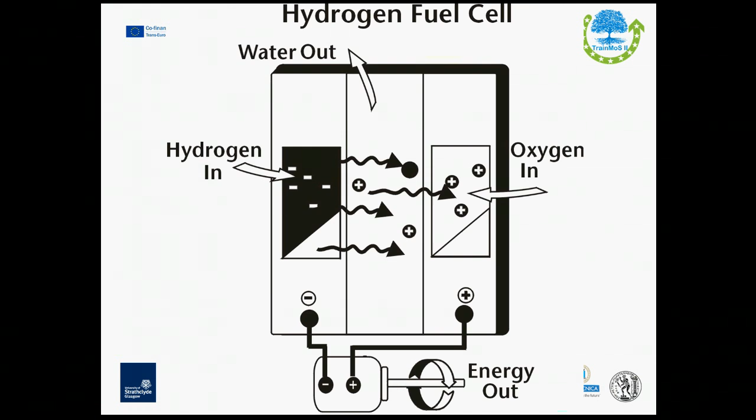So how does this work? In this apparatus, as you can see here, we have hydrogen coming in and oxygen also coming in, and then all the reactions create energy, and the outcome of these reactions is simply water. Water goes out. Let's see a video that describes how this works.

Another thing is also the hydration of the system, the delivery of the energy. There are a lot of risks there. The infrastructure that is needed, and actually we need to start upgrading the infrastructure in order to accept hydrogen production facilities. The storage of both the hydrogen and the oxygen, as well as the energy when it's already produced, and the safety and precautionary issues there.

Now, some examples where the energy has proven itself: of course, vehicles, bicycles, rockets, airplanes, buses, motorcycles, scooters. Pretty much in all different areas of energy needs, the hydrogen sources have proven themselves. However, going a little bit back, when it comes to ships and the maritime industry, and the shipping industry more precisely, the needs are a little bit different. And this is what you have to consider when selecting and addressing each system separately.

Now, again, some introductory definitions and issues that you have to consider. First of all, we have two different main families of fuel cells. The first is the stationary fuel cells. This is actually a system of fuel cells that can generate water from hydrogen or natural gas as a fuel, and from oxygen in the air, and as an output of this reaction, they produce electricity and heat.

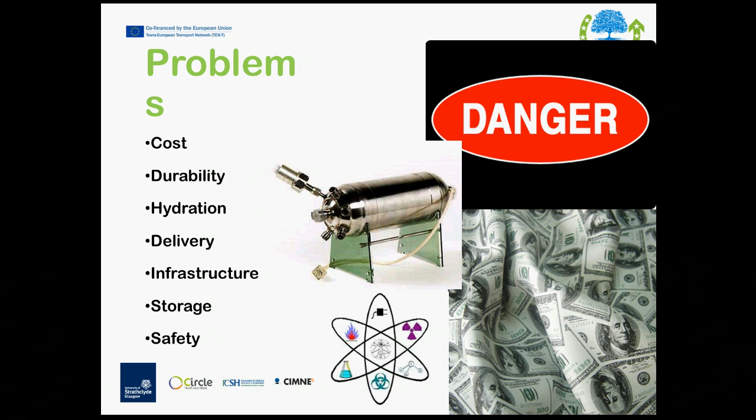So this reaction is carried out in each of the basic cells of the fuel cell, and each fuel cell consists of an anode, a cathode, and an electrolyte, which all allow the charges to move from one side of the fuel cell to the other. So the electrons move from the anode to the cathode through an external circuit, producing the electrical current and thus powering the load. Such cells are placed in series so that we can reach the adequate voltage output. When assembled together, the cells constitute an energy module of the required power known as the stack.

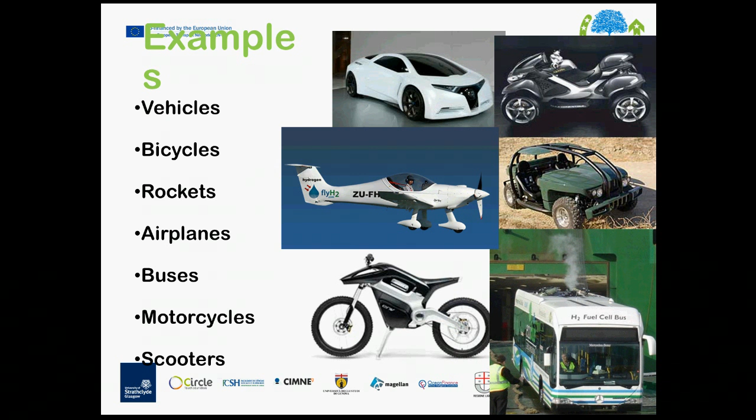Sorry guys, I don't know what's happening. It keeps on dropping out the internet and closing down. So please bear with me.

Now, that said, the fuel cell types belong to these three categories. The first one is the proton exchange membrane fuel cells, the icon we saw earlier. We also have solid oxide fuel cells, and we have the molten carbonate fuel cells. These fuel cells are classified according to the type of electrolyte they are using. In the proton exchange membrane fuel cells, a proton conducting membrane is used as an electrolyte.

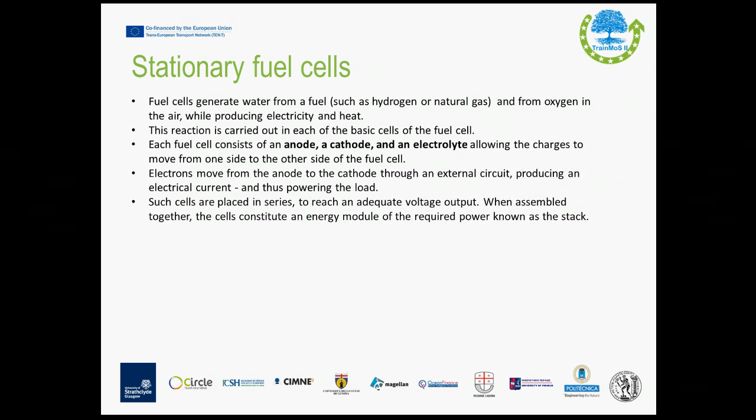So in pure hydrogen proton exchange membrane fuel cells, hydrogen is dissociated into protons (H+) and electrons on the anode. Protons are conducted through the proton conducting membrane to the cathode. As the membrane is electrically insulated, the electrons move from the anode to the cathode through an external circuit, producing the electrical current. On the cathode, oxygen reacts with the electrons and the protons, and they form water. Of course, these are the basic reactions. It's purely sixth grade chemistry, or even earlier than that today.

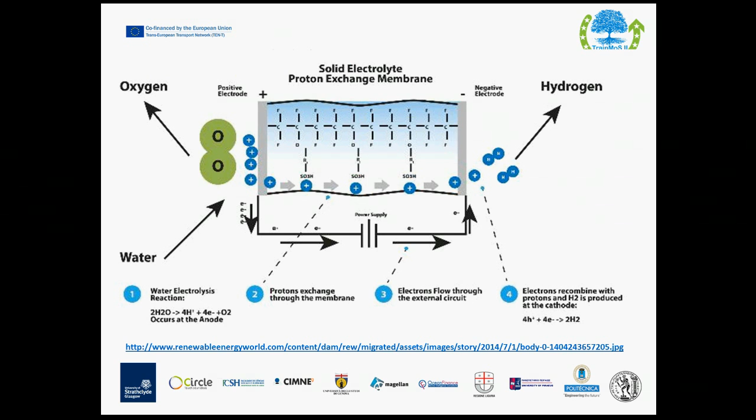Such fuel cells operate at temperatures between 50 and 220 degrees Celsius, but typically in the range of 80 to 90 degrees Celsius. Other types of these structures also exist. For example, some of them are fed with a mixture of carbon dioxide and hydrogen. And the proton exchange membrane fuel cells are preferred for mobile applications, because they are easy to set up, they are not so sensitive, and of course they are cheaper.

Now, the second family of fuel cells is the solid oxide fuel cells, which use a ceramic material called yttria-stabilized zirconia as an electrolyte. In these solid oxide fuel cells, oxygen gas reacts on the cathode with electrons, and they form negatively charged oxygen ions. These oxygen ions move through the electrolyte from the cathode to the anode, where they react with hydrogen gas, producing electricity and water.

Solid oxide fuel cells operate at higher temperatures between 800 and 1000 degrees Celsius, and they can be fed with fuels other than hydrogen gas, such as natural gas, for example, or some other type. The natural gas is then reformed internally and converted to hydrogen.

The third family is the molten carbonate fuel cells, which use lithium potassium carbonate salt as an electrolyte at very high temperatures above 600 degrees Celsius. This salt melts and allows for the movement of negative carbonate ions through the electrolyte. On the anode, hydrogen reacts with carbonate ions to produce mainly water, carbon dioxide, and electrons. The electrons then move from the anode to the cathode, producing an electrical current. And on the cathode, carbon dioxide from the anode and oxygen react with the electrons to form carbonate ions.

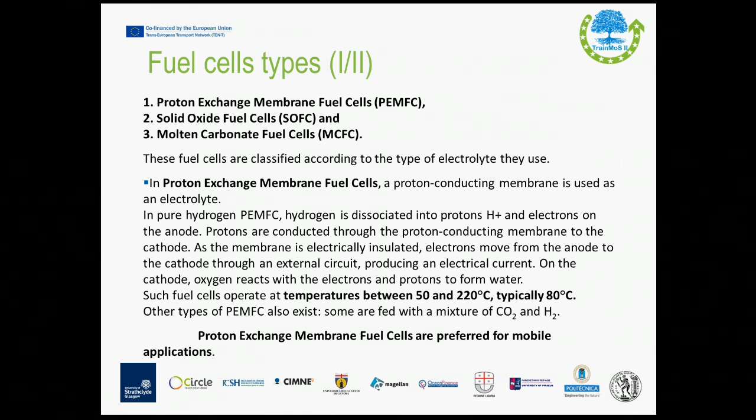Molten carbonate fuel cells are fed with fuels other than hydrogen gas, for example natural gas or any other gaseous type. And as in the solid oxide fuel cells, natural gas is reformed internally. So because of their high operating temperatures, though, and because they're not that stable,

they cannot be used as mobile devices, and they have slow startup times in order to reach the high operating temperature. They are used only for stationary applications, stationary stations, for example in large warehouses, or they could be used in large ports.

Now, hazards and safety measures. Fuel cells are low pressure systems, and upstream of the fuel cell, the hydrogen feed pressure is reduced to low pressure, for example, 250 millibars, less than a bar, at the cell's inlet of the Axane fuel cell Comm Pac. This is one of the devices that are widely spread.

So when we are talking about stationary fuel cell systems, most of them are free from hazards related to handling pressurized hydrogen. So it's quite robust when using hydrogen. However, since fuel cells consist of a stack of basic cells in which chemical reactions take place, there is the risk of leaks, and this is one of the main hazards

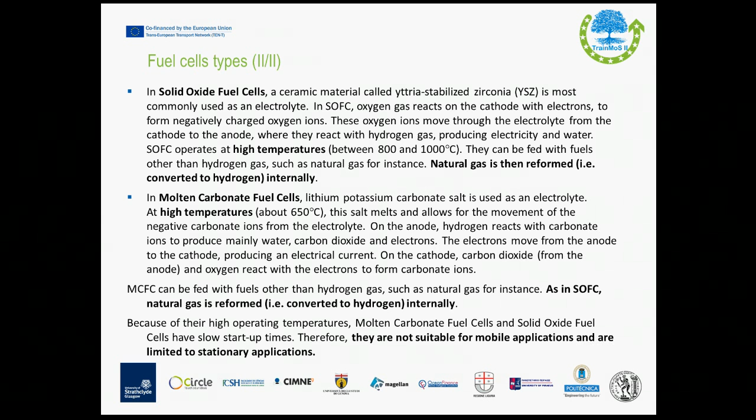And this is why we actually haven't used such energy sources so heavily so far in other modes of transport like shipping or short sea shipping, because of these issues that have not been studied yet.

Now, some standards. These are the standards that all the stationary applications have to comply with. For example, the IEC 62282 on fuel cell technologies. We will not be discussing those per se. I have just included all these standards for you to study in your spare time, or if you decide to go down this road using hydrogen, start studying all these standards.

So we have the fuel cell technologies. What are the fuel cell technologies? What is the main terminology here? We also have the minimum requirements for safety and performance of fuel cell modules, which apply to all fuel cell modules with alkaline, proton exchange, and so on, electrolyte chemistry.

We have basic fuel cell power systems with regard to safety and the measures that have to be taken in self-contained fuel cell power systems, or fuel cell power systems comprised of factory matched packages and so on. We have the fuel cell systems.

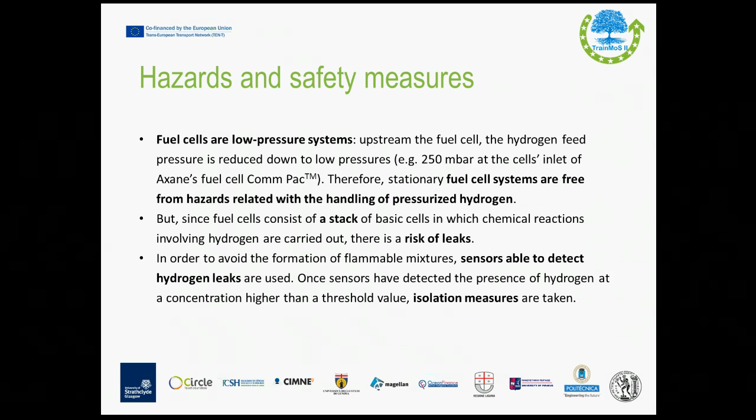This IEC 62282-4 is the standard that pertains to fuel cell systems for forklift applications. Actually, forklift applications are some of the more robust applications that we are using these days in shipping value chains, so to speak. So this standard pertains to these applications.

Additionally, similar to these forklift applications, we have other auxiliary systems that are based on similar energy sources and energy source structures. We also have fuel cell technologies for small stationary power systems serving as heating appliances, both producing heat or producing cold, and this is actually what is needed in cold storage.

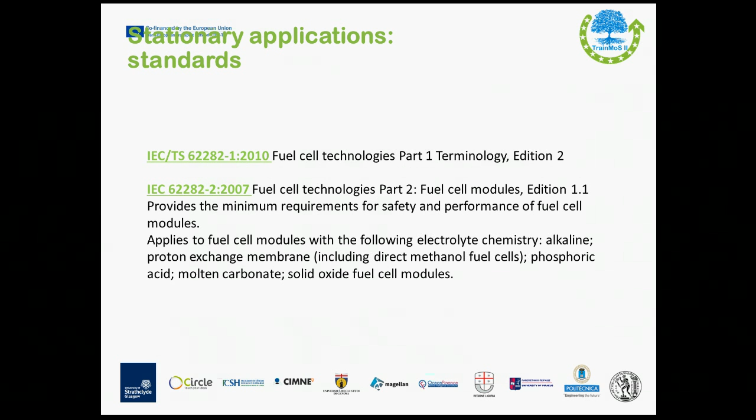For example, in a small cruise ship, the cold storage for the stores or for the food, with vegetables and stuff like that. We also have stationary fuel cell power systems installation guides, which provide the minimum safety requirements for the installation of indoor or outdoor stationary fuel cell power systems.

This standard here covers the safety, performance, construction, marking and test requirements and the interchangeability of fuel cell systems on board specialty vehicles and other auxiliary power units for the transport value chain.

And the last one here is fuel cell technologies for stationary fuel cell power systems, safety issues and safety precautions, which is partly covered by the IEC 62282. Basic considerations, then further on, basic considerations of indoor use of hydrogen standards.

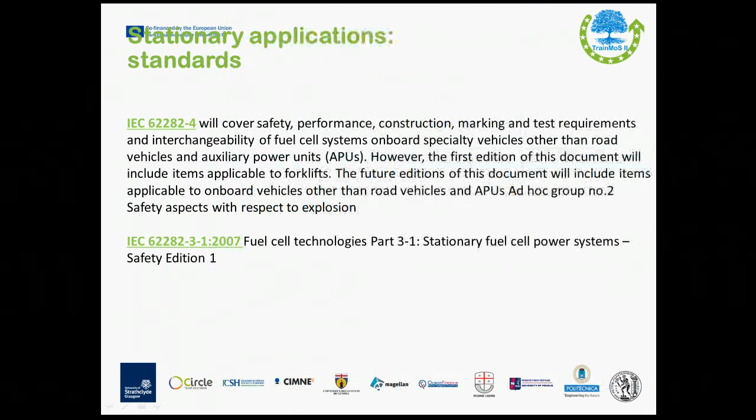Now, there is a set of standards describing the explosive atmospheres, what are the safety precautions, and what is the equipment that can be used or should be used in order to protect ourselves. So parts 1 through 18 of the IEC 60079-1 give all these definitions and explain in more detail what sort of equipment is needed.

Also, there are the material characteristics for gas and vapor classification, the test methods and the data. It's actually the network of sensors that we were discussing earlier on, what sort of sensors are needed there. And the last one is the explosive atmospheres, the gas detectors specifically, and the performance requirements of detectors for flammable gases.

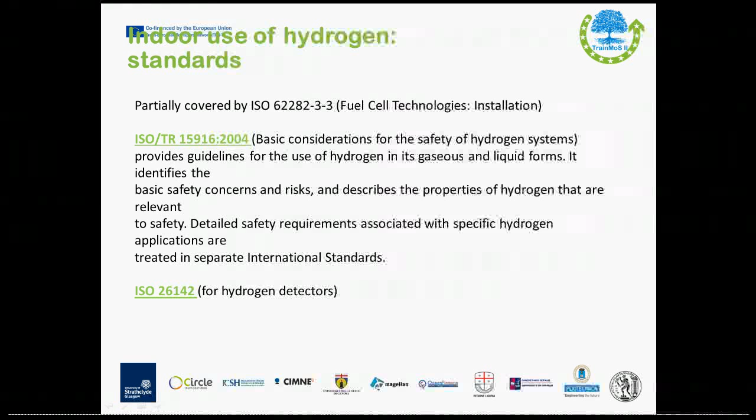Now, that said, we will go through a short case study of deploying fuel cell powered forklifts at large distribution centers of the USA Department of Defense. This is a case study by Michael Keynes back in 2013. He tried to study not only the effectiveness but also the efficiency and the cost efficiency of these systems.

Now, these are the four project sites that were used over there. We have four different types of mobile and stable production.

Now, the approach included gathering all the detailed cost data at each site from participating manufacturers, the on-site staff, and open source literature, comparing these costs against some benchmarks that they already had, and comparing them with alternatives that they could find. They also tried to address capital and operating costs, CAPEX and OPEX, and they tried to analyze about 10 years forward looking of real costs without making any discounts.

That is, they tried to make the analysis without playing around with interest rates and making up things with the NPV. Now, let's see what they came up with. First of all, the cost categories that they considered. These are the cost categories that you have to consider when addressing these hydrogen production units.

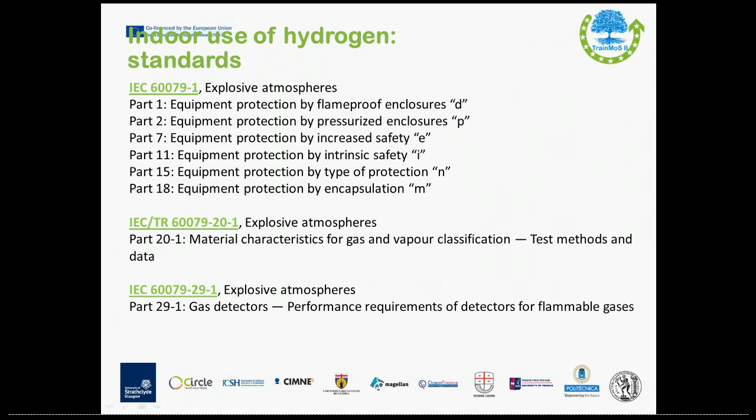Infrastructure depreciation, infrastructure operation and maintenance, the space that is needed, the fuel source, whether it's going to be natural gas or water or whatever, and the power that is required in order to give sparkle to this system. So in this case, they compared the cost of the delivered H2 energy source.

Now, with regards to the fuel cells, what were the cost categories that they considered? The forklift depreciation, the forklift operation and maintenance, and the spares and servicing of the forklifts. Also, the fuel cell operation and maintenance, including the spares and servicing, fuel cell refueling labor time, the hydrogen infrastructure operation and maintenance, the infrastructure space cost, and the hydrogen produced and delivered.

Now, some more cost categories for alternative energy sources, for batteries and propane. In the case of batteries, they tried to come up with figures regarding forklift depreciation, forklift operations and maintenance, battery depreciation and operation and maintenance, charger depreciation and charger operation and maintenance. That's one of the biggest cost elements in this analysis, in this study.

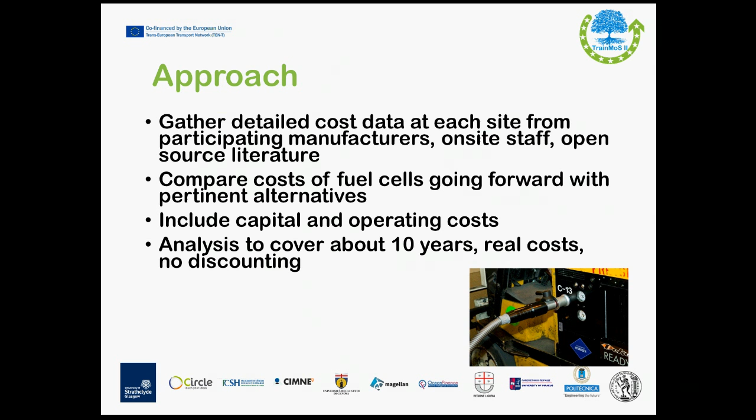The power that is needed to recharge the batteries, the battery change labor, the infrastructure operation and maintenance, and the infrastructure space cost. Also, with regards to propane, the cost categories considered were the forklift depreciation, the forklift operations and maintenance, the fuel, the price of the propane, the infrastructure depreciation, the infrastructure O&M, the infrastructure space, and the refueling labor.

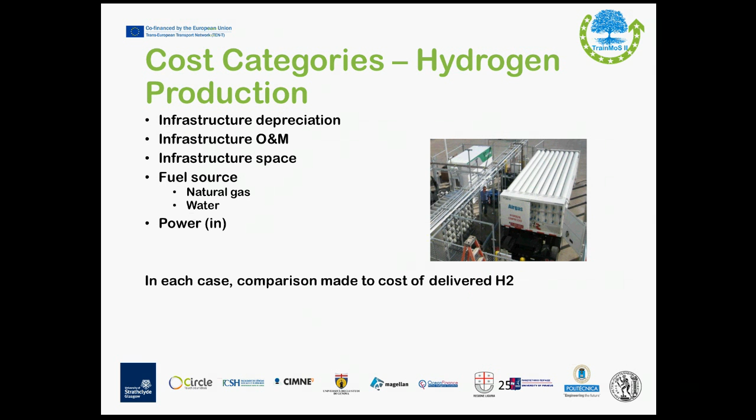So as you can see over here, they tried to come up with relevant figures from all the different sources so that they could produce a level playing field along all the different systems that they were analyzing there.

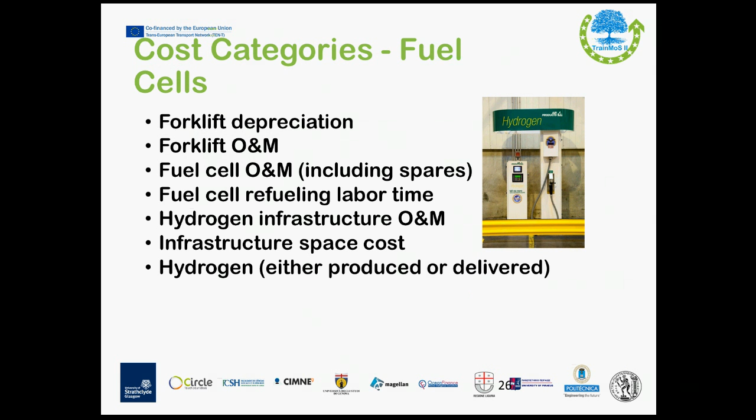Other factors that were also considered are non-economic factors, including the reduction in hydrocarbon emissions, the reduction in greenhouse gas emissions, the enhanced work productivity with fuel cells, the DoD leadership in national energy effort by creating a market opportunity for fuel cell technology. That is the branding that the DoD wanted to put forward. And the development of a transport option that might have value to DoD and others in the future. So they tried to consider the wider social implications that this new technology had.

So the thing here is, of course, you can all understand that in the first case we have solid figures that we can assess quantitatively, and in this case we have more of a qualitative assessment. So no matter what hard figures you might come up with, if the leadership really wants to invest or really wants to adopt this new technology, then you cannot really go by this decision. But anyways, we will see what happens there, and we will see what are the key drivers in this decision.

Now, we can see that the cost of producing the H2 and the cost of delivering the H2 is different in each case. For example, in one of the sites, the DDWG, which had a steam methane reformer, the cost of producing H2 was about $22.4, and the cost of delivering the H2 without counting any system losses was $22.5 a kilo. So we can see that there is a difference, a big difference between cost of producing and delivering, and this goes along with the rest of the figures there. So there are a lot of systemic losses over there that we have to address.

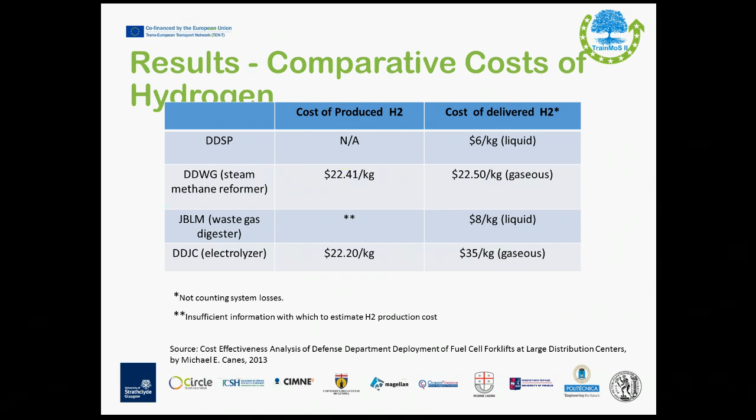So if you have, let's say, a small warehouse and you have a couple of forklifts or whatever, and you will be using your hydrogen production facility for a couple of hours a day, then this entire structure has a lot of fixed costs, and you would end up paying a lot of money upfront for this investment without ever being able to take this money back. So you have to compare the utilization. You have to run this system as efficiently as possible.

And that's the second thing, that when they tried to compare different solutions, the cost of transporting gaseous H2 is higher than, for example, the cost of transporting, I don't know, water or whatever. So all these different elements in this cost structure came up with a different figure, and this would become a different factor in your analysis. You have to consider all these different practicalities, all these localities in your impact assessment, and see what is the best, fit for purpose system that you will be suggesting or proposing.

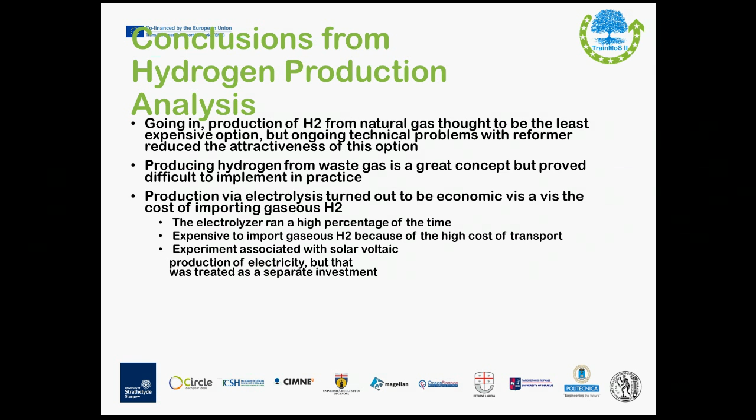That is, that it's very expensive yet to produce fuel cells. In 10 years' time, this curve will be lower. It will be easier and cheaper for us to produce fuel cells compared to what is the cost structure today. And actually, that was the idea, and that was the case with photovoltaics.

15 years ago, it was also expensive to produce energy from solar panels. Today, it's about a fourth of the original cost. Now, extrapolate this to an entire system. That was the vision 15 years ago. That was the vision from the European Commission to have entire areas, surfaces full of photovoltaics producing energy.

Now, the whole idea is that back then the cost, especially for smaller installations, was something like 3.5 to 4 euros per watt in order to install this facility. Nowadays, it's closer to 1.5, 1.4. So you can understand that the cost of installation has dropped dramatically, as is the production capability.

I mean, today, the same surface for photovoltaics can produce up to 3 times more compared to what the production capacity was 8 years ago. So you can see how all these systems evolve through time. And this is why we can see here that the fuel cells used in the forklift case cost twice as much as the old battery forklifts.

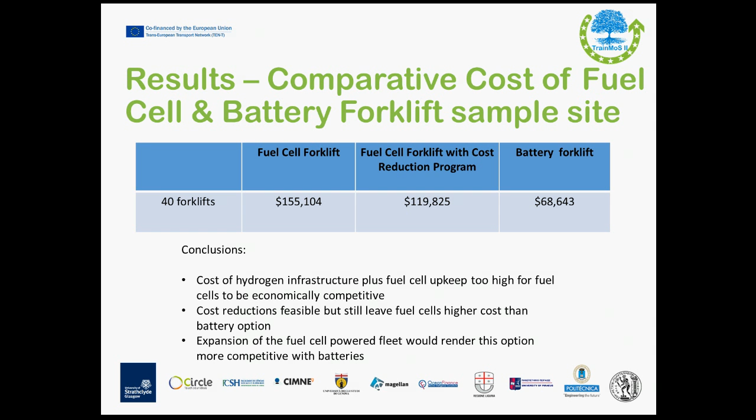For example, the propane-based forklifts are more risky compared to fuel cells. The hazards of explosions are quite more, and the consequences are more dramatic compared to fuel cell explosions and stuff like that. So these are more issues that someone has to consider before making any arrangements whatsoever.

Now, again, some more conclusions that came up were the utilization of the system itself, as well as adding more elements to the system, trying to utilize as much production time from the fuel cell production as possible. It goes back to the argument made before. All these issues and all these metrics have to be carefully considered before making any conclusions or any commitments to the system.

Now, some overall conclusions from this study. Fuel cells were not economically competitive in any of the four experimental projects, and these results were actually expected. However, the relative attractiveness could be increased by the following drivers, and these are the drivers that you can start manipulating in your analysis in order to see what's more economical, or these are the drivers that will make or break your proposal or your system.

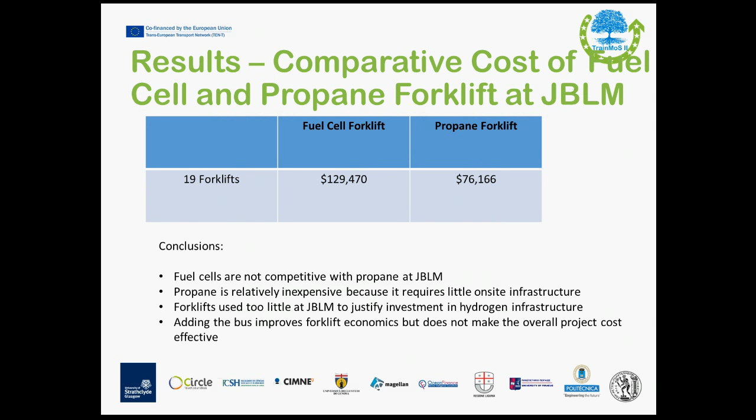Similarly, in the shipping sector, the late Marco Polo 2, the Motorways of the Sea nowadays, part of the TEN-T program, subsidizes heavily alternative energy sources for the shipping sector. And even national initiatives in each of the European Union member states also subsidize heavily alternative energy sources.

And of course, there is a certain trend with the ports these days to supply green energy to the ships, the cold ironing of the ships. And this green energy usually comes from windmills, photovoltaics, hydrogen, and so on and so forth. So you can see that there are a lot of incentives that could be taken as an advantageous form of making up for the cost of energy supply.

This goes along with longer-term contracts with specific companies. By the way, in the shipping sector, this has taken the form of cold ironing for the ships, or energy supplies for refrigerated containers directly from the energy producers in its member state, in its EU country.

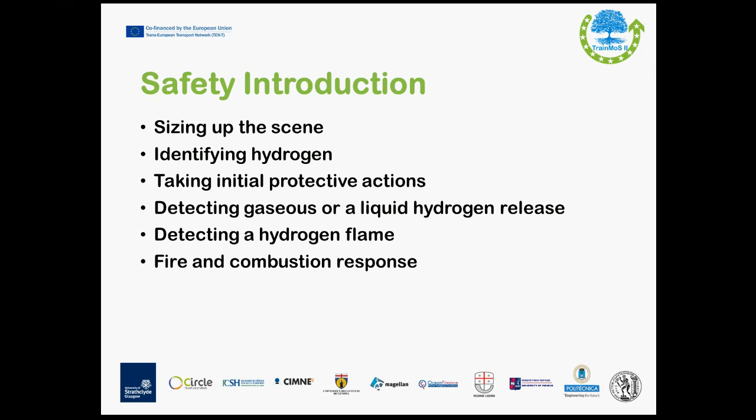And of course, the standard firefighter turnouts and respiratory protection are in any way necessary when working on an incident where hydrogen leaks or fire occurs. And if the incident itself involves liquid hydrogen, you have to wear thermal protective clothing too. That's a very crucial thing, a very important issue there.

Now, non-static equipment and tools are required. Why? Because in leakages, hydrogen cells are quite, and we're going to see that later on, quite explosive. And of course, if you also add up the LNG, that is one of the raw materials to produce fuel cell energy, it is even more explosive. So all of the people working in such environments have to wear non-static equipment, and all the tools have to be insulated from static electricity.

That also pertains to fire extinguishers, fire blankets, brooms, pretty much whatever you will be using there has to be insulated. Now, wearing jewelry, rings, necklaces, all that stuff is strongly discouraged, as most of the bibliography says. Why? Because these might bear static electricity and might produce the ignition for the explosiveness of hydrogen. And equipment also provides firefighters, and all those working there, with the essential protection that is necessary from the potential of electric shocks, flammable explosive gases, hazardous fumes, and so on and so forth.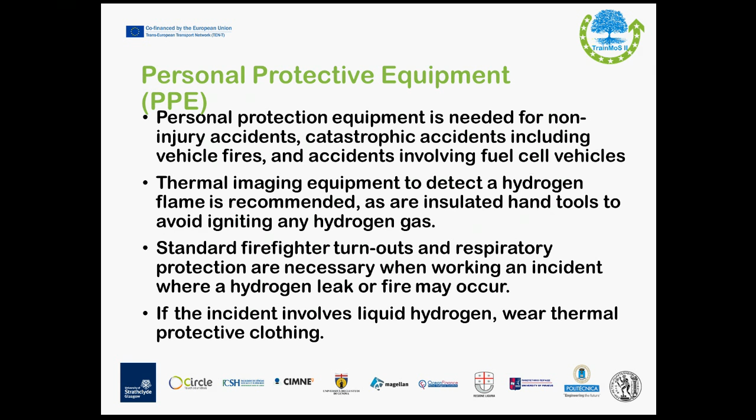By the way, we're going to see that also later on, but the power that is needed to produce energy from fuels, for example in vehicles or in forklifts, is higher compared to traditional energy sources. For example, in traditional energy sources, you have 12 volts or 24 volts, and that's the maximum. However, in hydrogen powered systems, the voltage might reach more than 50 volts, and 50 is actually the threshold where you can have a heart attack.

So you can see that if you're not insulated enough, you might be electrocuting yourself when trying to handle equipment in such an environment. So you have to be very, very careful. You have to wear all the protective equipment in order not to harm yourself or anyone else there.

Now, additionally, personal protective equipment that should be worn in a hazardous environment includes self-contained breathing apparatuses, coveralls, turnout pants and turnout coats, fire-resistant gloves, of course, high-voltage rubber gloves, and that's very important, especially in stationary stations where the voltage is quite higher compared to other stations. Boots, steel toes and shanks are also necessary.

Helmets, face shields, and in some cases where we have leakages of poisonous or other sorts of material, in cases of hazmat that is, you have to have hooded chemical resistant clothing. That is the two-piece chemical splash suits, the disposable chemical resistant overalls, and the disposable chemical resistant boot covers. So all of that is quite necessary when an incident occurs.

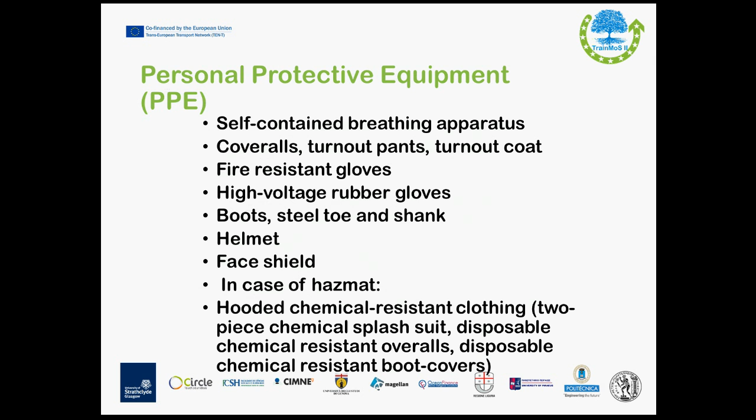Now, general hazards and risks for hydrogen storage. Hydrogen is capable of migrating through small openings, so even small cracks on the equipment will release the entire content of the container. The main concerns there for the emergency responders, so if something happens in a warehouse that you could be working in, or on a ship, on a vessel, or in the port, is that you have to protect yourselves from electrical shocks and from the flammability of the fuel itself.

Other additional concerns might include cryogenic burns and asphyxiation. For example, the cryogenic burns, you will see later on that on certain cracks, when the hydrogen is released, you can see a snowy-like area, a frozen area around the crack from the low temperature of hydrogen. This can produce cryogenic burns, which are treated, but it's not a good thing to have actually. And of course, asphyxiation, we talked about asphyxiation earlier.

Now, venting of stored hydrogen may also be the best means of mitigation, ventilating the situation that is, as long as the area is free from ignition sources. So you have to be very, very careful of the situation over there.

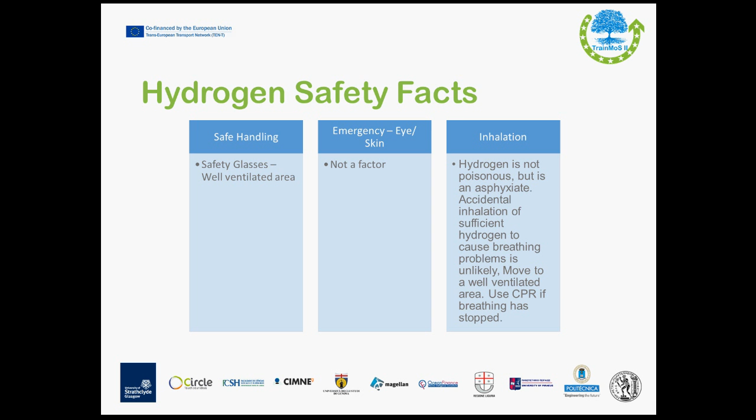If there are any ignition sources whatsoever, you have to be extra careful in the ventilation. Hydrogen will dissipate very quickly and will combine with oxygen to form water. So these are things that you have to consider in order to attack a leakage of hydrogen.

Now, how to? Easily said, you have to actually eliminate all ignition sources. So no smoking, no open flames, no ignition from wires, stuff like that. You have to keep all your tools and all the equipment in good condition, and you have to use only non-sparking tools. For example, you will not use any cutting machines that produce sparks there. So you have to be very careful to use not only the correct tool, but also the correct size for the tool in order to loosen or tighten the hardware.

Now, another thing is that you have to wear non-synthetic clothing, so nylons and stuff like that are a no-no. Ordinary cotton or flame retardant cotton or any other similar clothing is of course preferred. And the electrical equipment must be explosion proof and intrinsically safe or purged. So all of the equipment has to be very carefully selected in those areas. So you have to be very careful in addressing the specific risks and selecting this equipment.

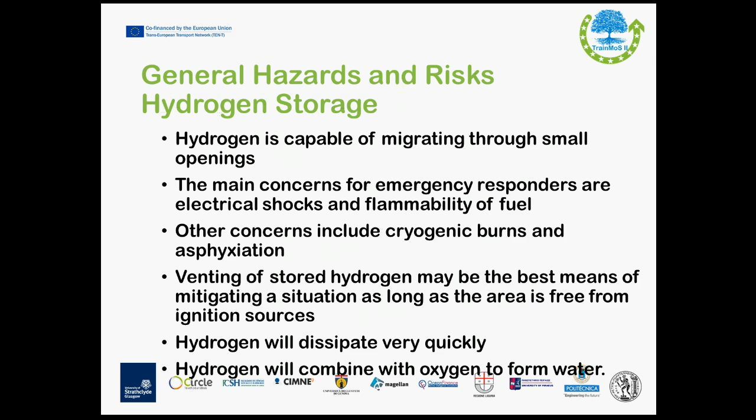All hydrogen-containing fuel systems have a great propensity for at least small leaks due to the pressure of the gaseous hydrogen and the small size of the molecules. So, unfortunately, at the end of the day, at least for now, there is no such structure that can restrain, can limit small leaks. We don't know how the technology is going to evolve, but for now there's no such system.

This is why you have to be extra careful in the areas where the transfer of hydrogen is taking place. And this is why we discussed earlier in the case of the DoD, the necessary space for the infrastructure that you're going to be building up, your system, your container system, it has a certain amount of cost because it has to be distant, it has to be covered, and it has to be protected from the rest of the warehouse, for example, in that case.

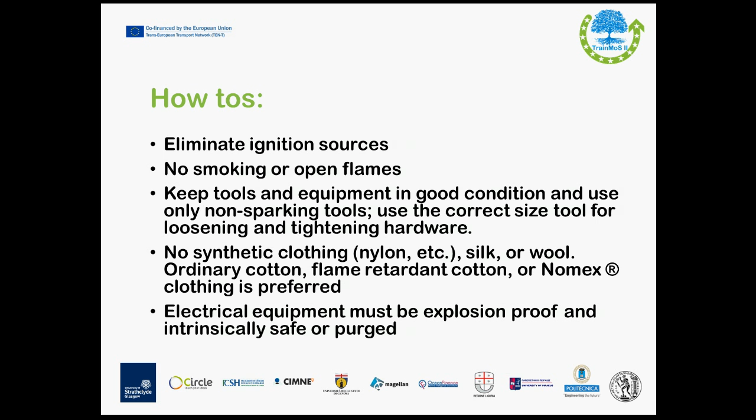Now, because of the high dispersion rate of hydrogen, small leaks would likely pose a problem only in rare instances, but this usually takes place in unvented or very tight or small individual garages or warehouses or storage rooms. And again, going back to the previous argument, this is why all the transfer facilities and the storage facilities are quite away from the main theater of operations for the production facility, in order to keep away all of these factors that could produce a spark or ignite or generally increase the risk.

Now, safety concerns in larger unvented private or public parking garages for the case of cars, which are more often these days, will be more of an issue. For example, public garages in malls have an issue. Now, comparing these to shipping systems, RoRo ships have a higher risk, as is the case of small energy production facilities in small container ships and small cruise ships. But this is something that you have to acknowledge and you have to take care of.

Now, some general precautions there. You have to be very careful not to crack open a hydrogen cylinder to clear the valve of dust. Why? Because there are always some hydrogen leftovers in the cylinder, and these leftovers may ignite. And this is one of the cases that actually increase the daily risk. Another thing that you have to consider is to never drop, drag, roll, slide, or handle the cylinders in any other way than the designated way.

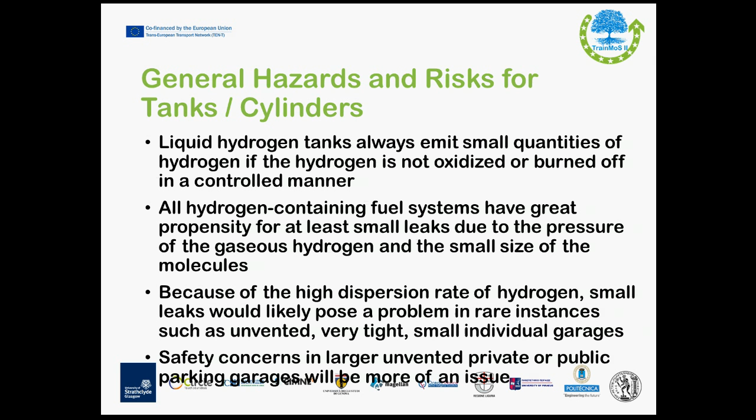Now, what about the valves, the leaks, and the PRDs, the pressure relief equipment? Hydrogen systems include high and low pressure fuel lines, so you're gonna have high and low pressure fuel lines, and you have to be able to recognize which is which. Of course, you should not mess with any of them, but if need be, you have to put extra care on the high pressure fuel lines.

They are equipped with pressure relief devices, all of them, and similar structures, so that the environment is safe enough. And the location of the PRD devices depends on the type of the system. You can easily understand that there is no standard location whatsoever. For example, in cars,

these are mounted on the boot of the car. However, again, this may vary, and you have to be extra careful in order to recognize where this is, so as not to mess around, to be more careful in there. For example, you should not make any actions that would ignite or produce sparks near a PRD device.

Now, hydrogen leaks generally originate from valves, flanges, diaphragms, gaskets, and other various types of seals and fittings. So you have to be extra careful there too. And for leaks that are relatively small and controllable, you have to use the shut-off valve. But for leaks that are uncontrollable but quite large, you have to try to shut off the supply source. If this cannot happen, you have to evacuate the area in order to protect yourselves.

Now, indicators. For compressed hydrogen, a loud hissing or shrilling with a PRD release and a concentrated flame or stream is apparent there. For liquid hydrogen, a fog or a cloud formed around the cryogenic hydrogen storage tank is apparent. You can see, for example, ice crystals that are formed around the storage tank. This is a very good indicator that you have a leakage.

Now, liquid hydrogen poses greater risks than compressed hydrogen because it's actually cryogenically reduced its temperature, and this can induce personal injuries on you. Now, hydrogen, when stored as a liquid, is usually stored at minus 253 degrees Celsius. So it can, of course, cause not only cryogenic burns, but it can damage your lungs. So you have to be extra careful there.

Detection sensors and personal protective equipment are quite critical when handling liquid hydrogen, and properly working ventilation equipment should be in place and should be regularly tested for its working conditions. It has to be working well so that all the hazards can be minimized.

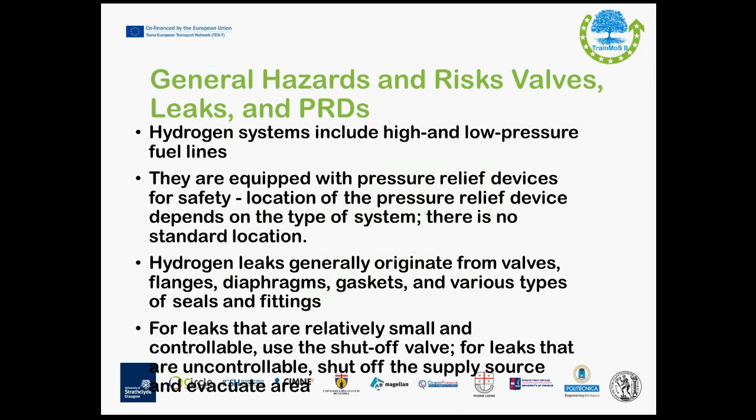Now, precautions. You have to eliminate any source of ignition and, if possible, remove cylinders from the area where there is a problem to remote, preferably outdoor locations away from possible sources of ignition. So you have to transport the cylinders away from the area that is problematic. Then you have to ventilate the area properly. So that's another issue for those developing such systems.

You have to have in place not only the stable ventilation, static ventilated facilities, but you also have to have some mobile ventilators in order to ventilate the area properly. You have to avoid skin contact with liquid or cold boil-off gases. Of course, this goes without saying for reducing the personal injuries.

And you have to be careful not to enter the area that contains flammable mixtures. For example, LNG mixtures should be avoided entering these areas. And last but not least, you have to avoid spraying water on pressure relief devices or gas vents.

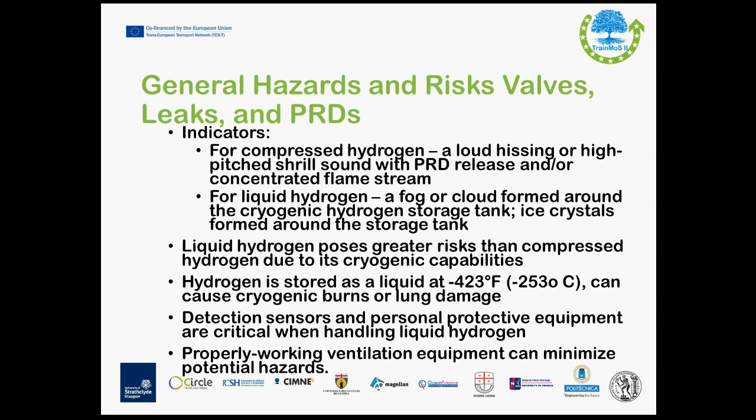Now, as we said before, hydrogen is an asphyxiant substance. In rare instances and in closed spaces, it can displace oxygen quite quickly, and this causes, of course, oxygen deficient atmospheres, and this in turn disables you from being able to breathe properly. Precautions on that: always open a compressed gas cylinder valve slowly to avoid rapid system depressurization or pressurization.

And in order to understand whether you have entered an environment that is full of hydrogen or an asphyxiating environment, you might have some headaches, or drowsiness, or dizziness, or excitation, or excess salivation, or vomiting and unconsciousness. If you feel like that, you know that you're in an asphyxiating environment.

Now, some general hazards and risks for hydrogen powered vehicles. The two main dangers from fuel cell and hydrogen powered vehicles are the electrical shock and the flammability of the fuel. Actually, this is not only the case in the hydrogen vehicles themselves, but it's the same case in producing energy in similar facilities in ports, in ro-ro ships, in cruise ships, and pretty much everywhere that is powered from hydrogen. So we said that the main risks with hydrogen-powered structures are the electrical shock and the flammability.

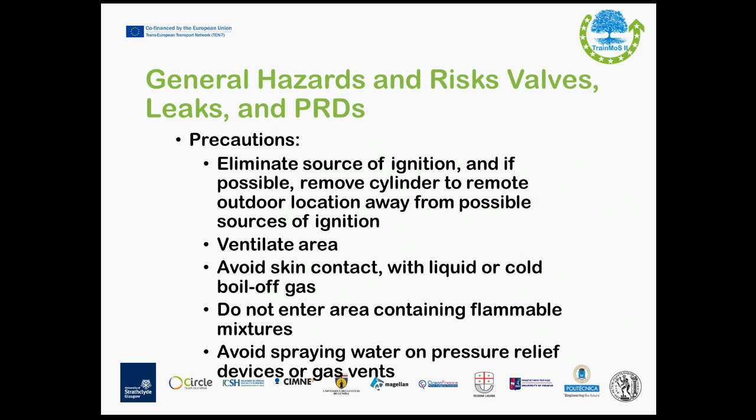We've said that the traditional vehicles are using 12, 14, or 28 V systems. However, the hydrogen powered ones operate on more than 50 volt systems, and some of them are even using higher voltages like 200 to 400. It's similar to the installations that we have in our homes.

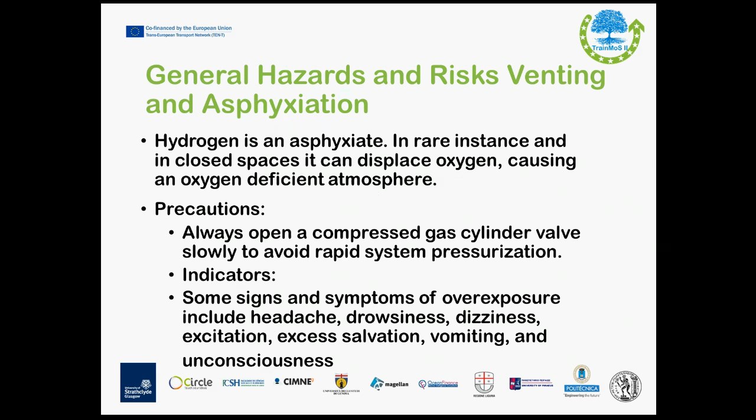By the way, the human heart stops at 50 volts. I don't remember correctly, but I think it's a couple of amperes, the intensity of the power, if I remember correctly. So you can understand that there is a high risk of electrocuting yourself if you go and try to tackle a hydrogen powered facility or structure in general. So you have to be extra careful and be extra aware of the dangers and the risks.

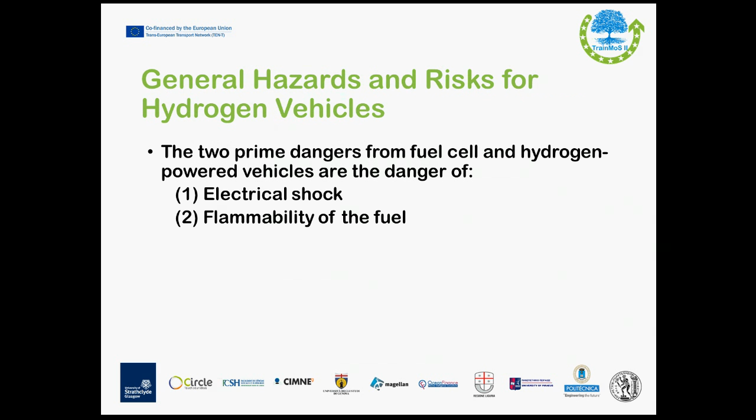Now, another thing is the hydrogen's flammability, which range is wider compared to other fuels. So you have to be extra careful. Don't say to yourself, gee, I'm not that close over there, so I can be safer. The flammability range is wider. And of course, you have to pay certain attention, because there are other fuels that are also used to power fuel cells, which include methanol, ethanol, methane, generally all these LNG, LPG structures. So you have to be extra careful, because it's a more powerful mixture,

the ones that they are using in hydrogen production. Now, fuel used to power a vehicle does not necessarily have to be stored on the equipment as hydrogen. So that's another issue there. And also you have to consider that reforming the different hydrogen sources, such as alcohols, methane, propane, and so on, or even regular gasoline or similar mixtures, creates gaseous hydrogen in the vehicle itself, and this can explode with a simple spark. That's why we are suggesting that there is a lot of risk. There are a lot of hazards in trying to assess the situation and protect people and equipment.

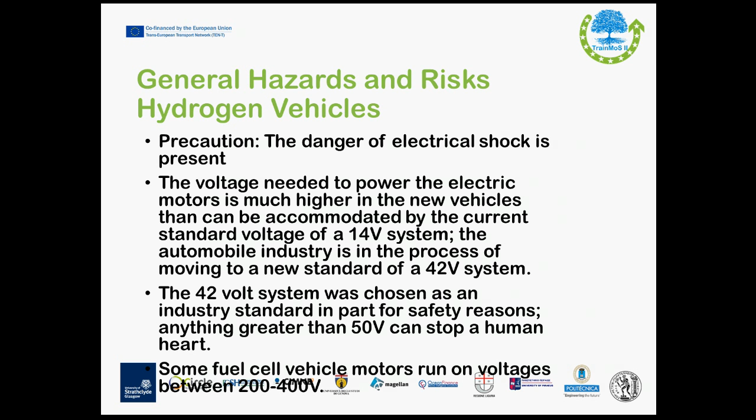Now, emergency procedures. First of all, you have to size up the scene. What is the situation? What are the problems? What are the risks? What are the hazards? What's going on in there? Do we have a car that has caught fire? Do you have a forklift that has exploded and there is a leakage? Is there an installation, a facility that produces energy from fuel cells, and it has a strong leakage? You have to assess what the situation is.

And in this assessment, you have to identify hydrogen in either commercial, transport, or stationary facilities. So you have to see what's going on over there. You also have to identify vehicles that are powered by hydrogen. And you have to start taking the initial protective measures. Now, detecting gaseous or liquid hydrogen releases is the next step. And you also have to detect whether there is a hydrogen flame. This is why we said in the beginning that you have to have thermal assessment equipment, because in most cases, especially in broad daylight, you cannot really see the hydrogen flame itself.

Now, the next step is to secure the vehicle in the case of a hydrogen vehicle accident, and you have to call for fire responses, firefighters that are specifically trained for responding to such incidents. And of course, you have to start pulling out the passengers or the employees from the vehicles or the structures, if you can. I mean, if you have all the protective equipment and if you have gone through the different measures and assessments discussed before, you can start extricating the passengers from these areas. If not, you have to wait for the specialized personnel to do that.

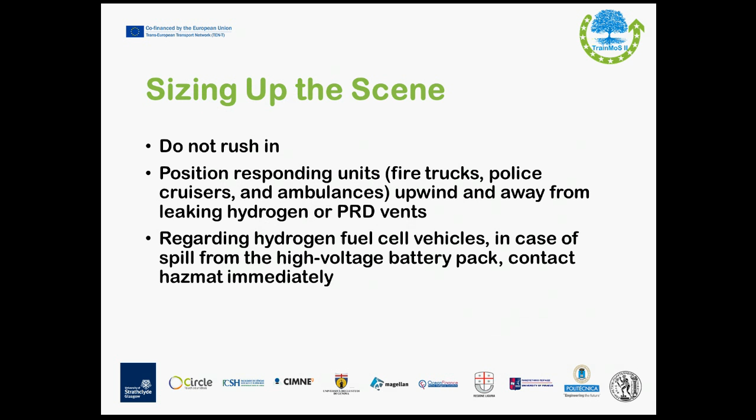Again, for those of you that will get into the establishing, the developing, and the implementation of such facilities, you have to go through the latest developments in DG, dangerous goods markings, either the IMDG, the IMO's dangerous goods markings, or any other relevant system that can or should be used.

Some initial protective actions when you arrive there or when you see that something bad is happening. So when you approach an incident, keep all the unauthorized personnel away, isolate the area, and try to stay upwind, on the other side of the leakage. Try to listen for venting gas and watch for thermal waves that would signal hydrogen-related flames, so that you can, first of all, protect yourselves and the personnel, and also notify the emergency responders.

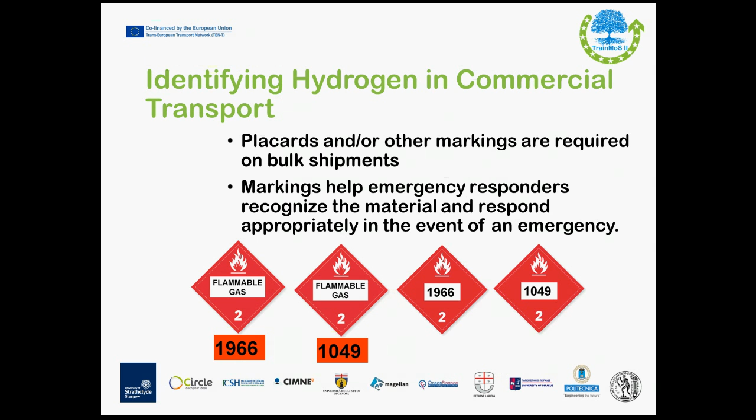Follow all the standard operating procedures that are set up, and you will be trained or you will train someone else. And eliminate all potential ignition sources, even keeping unauthorized personnel away for eliminating these ignition sources. And of course, last but not least, be aware that when hydrogen fire is detected, if you assess it in this way, you can allow it to burn itself off. If you can protect all the adjacent structures in the area, you can leave the hydrogen fire to burn off itself, and then the emergency responders can step in.

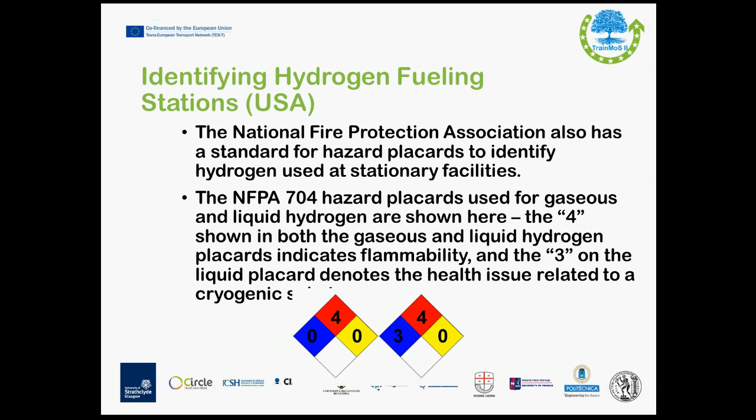Now, detecting the gaseous hydrogen release. Hydrogen gases are colorless and odorless, and unfortunately we cannot really sense them. This is why we need specific structures in order to recognize these releases and to cope with them. First of all, the first responder should listen for sounds of high pressurized gases escaping from the ventilator or from cracks of the container. If this is the case, you have to respond accordingly.

Otherwise, another option is for you to use commercially available thermal conductivity sensors, catalytic combustion sensors, or electrochemical sensors. These are all sensors that can be used to recognize whether you have a leak, where this leak is, and whether you have a flame and where this flame is. Now, gas and flame detectors can be permanently installed in storage facilities and fueling stations. However, as we said before, you can have mobile apparatuses that can be used in each specific case.

And last but not least, regarding vehicles, when it is safe to do so, as I said before, step back, listen first, and see if you can hear any hydrogen escaping, the hissing sounds, or look for frost around the PRD ventilator or the crack. Try to do those things first in order to assess the situation.

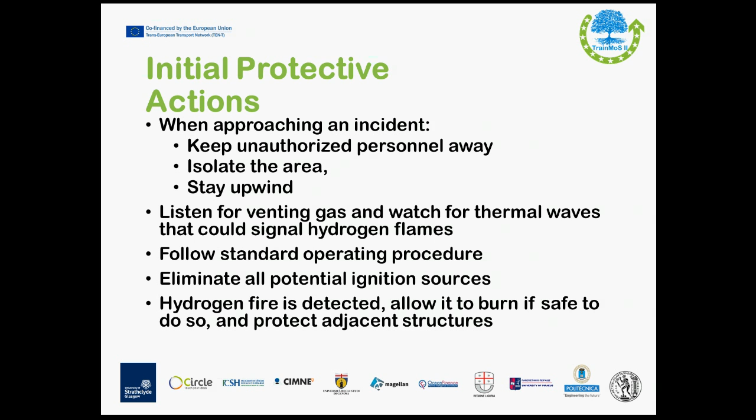Now, a leaking liquid hydrogen container may have frost or ice crystals, as we said, on the outside. You can easily see that and you can easily spot it. Small spills of hydrogen disperse rather quickly, so you have to think that any spill should be considered as a potential fire hazard, and any spill whatsoever might also induce flames, as you said before, and this is how you should approach such incidents. Larger spills, on the other hand, cause the ground to be frozen.

So larger spills do not vaporize quickly, so you have to be extra careful in these cases. As we said, cryogenic burns in these cases are quite often, and personal injuries can happen in no time in this case. Now, if this happens, you have to evacuate the area until the spill itself has dissipated, and you only use water sprays to reduce the fog that is produced and diffuse the vapors, and that's the only thing.

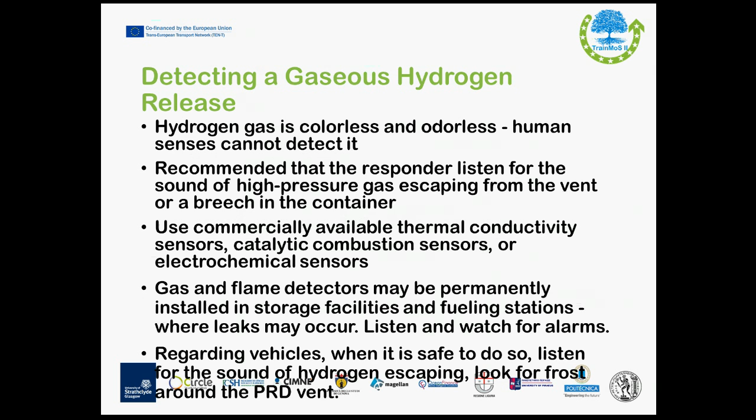So you have to pay attention, because even in dry climates, the liquid hydrogen spill will create clouds and fogs like that, since the condensed water vaporizes, and since the hydrogen warms, it will dissipate and rise rather quickly.

Now, flames. Hydrogen burns with a pale blue flame that is nearly invisible in daylight. The flame may appear yellow if there are impurities in the air, like dust, sodium from the ocean spray, etc. And a pure hydrogen flame will not produce any smoke whatsoever. Last but not least, hydrogen flames also have low radiant heat, unlike any hydrocarbon fire, where you may not feel heat until you are very close to the flame.

So this is why you have to be extra careful, and this is why you have to have a lot of sensors in place, in order to see whether something wrong is happening. Be extra careful, because all these, and especially the hydrogen related production facilities, do not give out any signals easily, so you have to be extra careful in order not to produce any injuries on your own.

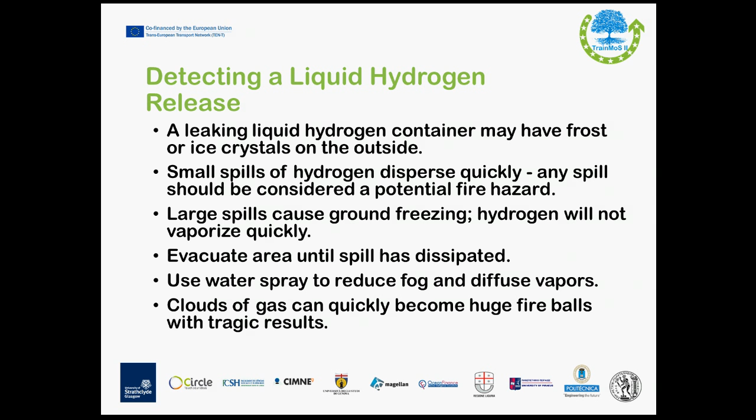When approaching a hydrogen vehicle that has been involved in an accident, immobilize, stabilize, and disable the vehicle. And you have to approach the vehicle at a 45-degree angle when possible, in order to help avoid direct exposure to a pressure relief device release. Now, we've seen that before.

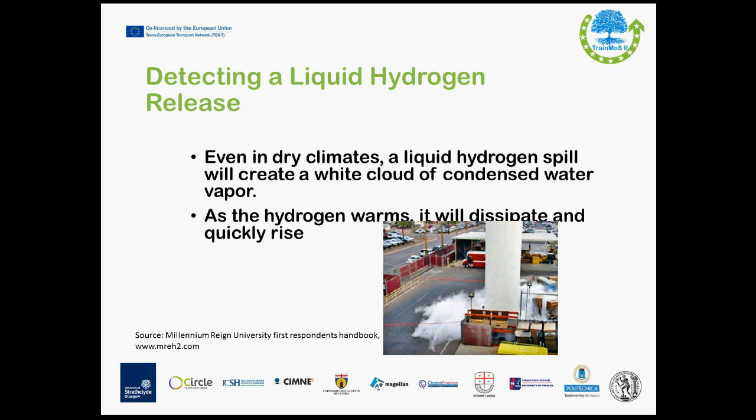Now, if safe to do so, try to isolate the high pressure hydrogen and high voltage systems by turning the ignition key off, or try to isolate the power source in the production facilities. It may take a couple of minutes for the electrical system to completely discharge, so don't go there quickly and start messing around, especially if you don't have protective equipment on you.

Once the vehicle is turned off, the high pressure systems are isolated. However, be very careful, because when systems fail, they might signal that the system is isolated, but in reality this could not be the case.

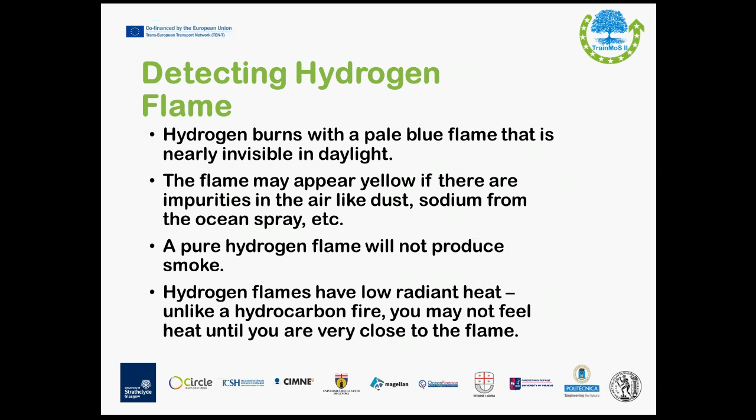Now, simply turning off the key closes the high pressure hydrogen gas tank. However, fuel lines from the tank to the engine take approximately a couple of minutes to get isolated. However, in any case, they still contain an amount of hydrogen.

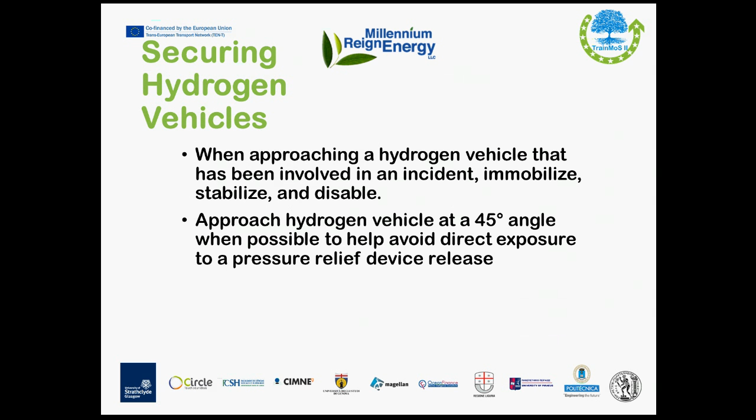Now, regarding hydrogen fuel cell vehicles, it is essential to identify both the main as well as the auxiliary electrical system over there, and you have to refer to vehicle emergency response guides in order to identify high and low voltage systems, which are which, so that you can cope with them.

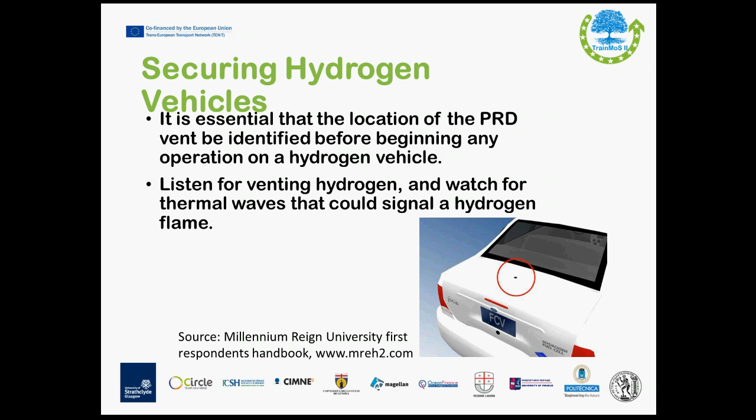The high voltage battery packs must be disconnected from the electrical system in order to protect the rest of the system. And in order for you to do that, you simply have to remove the high voltage service disconnector. To remove this switch, turn it counterclockwise and lift it out. Refer to vehicle emergency response guides to determine the specific location of any switch whatsoever.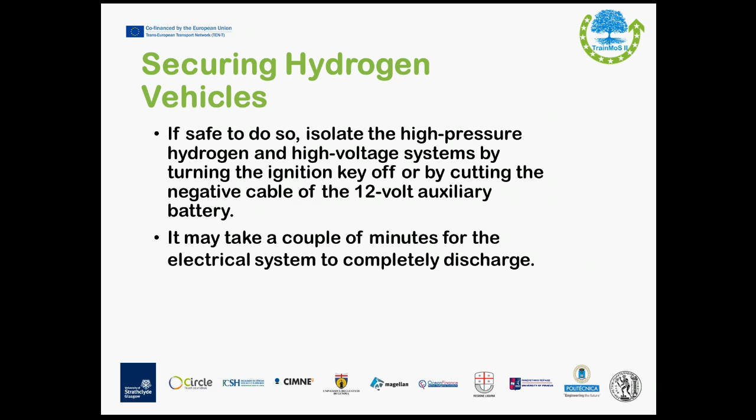And this now gets us into the issue of proper training, especially when you have larger facilities like storage facilities in ports, or refrigerators, or similar facilities on ships. You have to train the personnel very, very well in order to be able to cope with such incidents, in order to be able to address these issues.

Fire and combustion response. The best way to handle a hydrogen fire is to let it burn itself off, of course under control, until the hydrogen has disappeared and burned off. Small fires can be extinguished with carbon dioxide or water sprays. However, larger fires may be controlled with steam and/or nitrogen

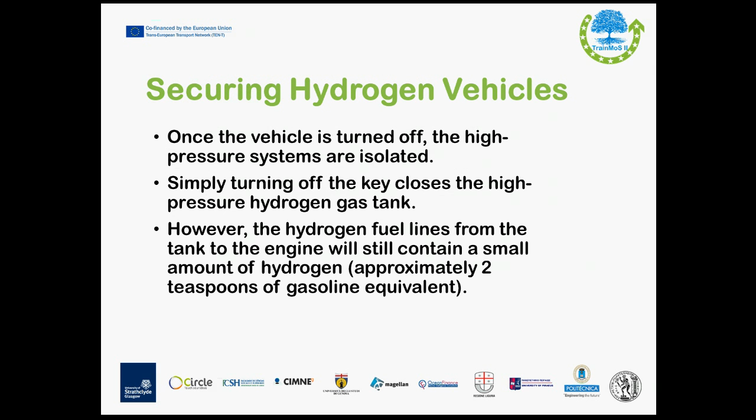firefighting mechanisms. Now, if a fire is extinguished before all the gas burns off, watch for pockets which may suddenly reignite. So watch for areas where there are hydrogen leftovers or mixture leftovers, because small sparks may ignite it again. A hydrogen flame is invisible under many conditions, so you have to be very careful, very careful.

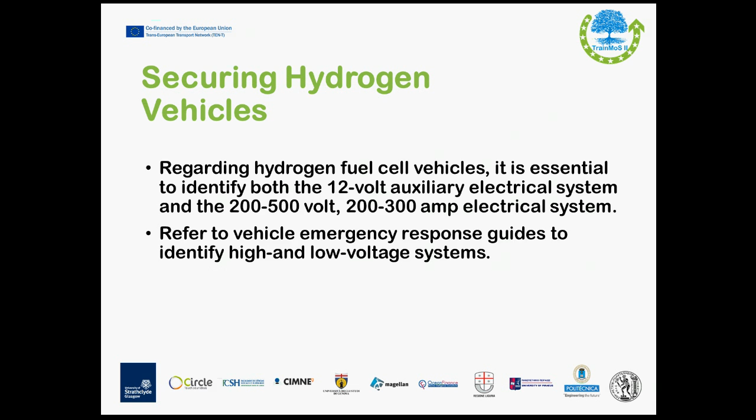And burns may result from unknowingly walking into a hydrogen fire. Hydrogen flames cause little damage from radiation, so there's no great risk there. Hydrogen flames can burn in a strong wind and be stretched out away from their source by a significant number of feet. And tanks containing hydrogen should be cooled with water if they are near a fire.

Pipeline fires where shut off is possible and with flame characteristics of a jet or torch can be effectively controlled by slowly reducing the flow of hydrogen feeding the fire, or when the jet is small enough to be approached, put out the flame with carbon dioxide or dry powder extinguishers, or closing the supply of hydrogen off completely, or ventilating the area thoroughly.

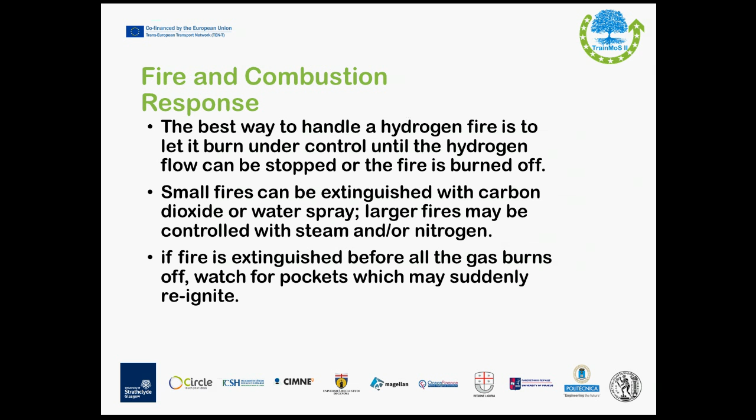Now, pulling people out, extricating people: never cut into the hydrogen fuel lines or the hydrogen storage tanks or the PRD ventilation lines. For hydrogen fuel cell vehicles, do not cut the electrical cables of the battery pack.

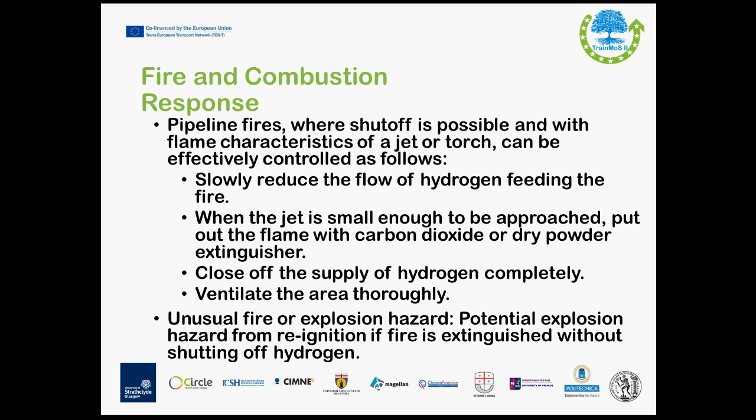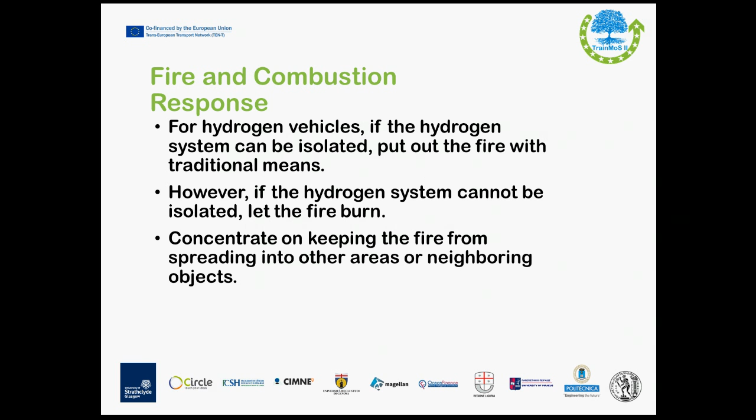We didn't discuss anything today about risk management and how to approach it from the academic perspective. Professor Zanatos tomorrow will be discussing more on the theory behind assessing the risks themselves and all the different methodologies that are used in order to make a formal assessment of the environment. This is why this training module was intentionally made to be more practical, to see the everyday risks that arise from using hydrogen. Tomorrow you will be discussing these methodologies with Professor Zanatos and with Theodoris Styliades.

And we will also move on Friday, if I remember the schedule correctly, to a mock assessment of similar systems.